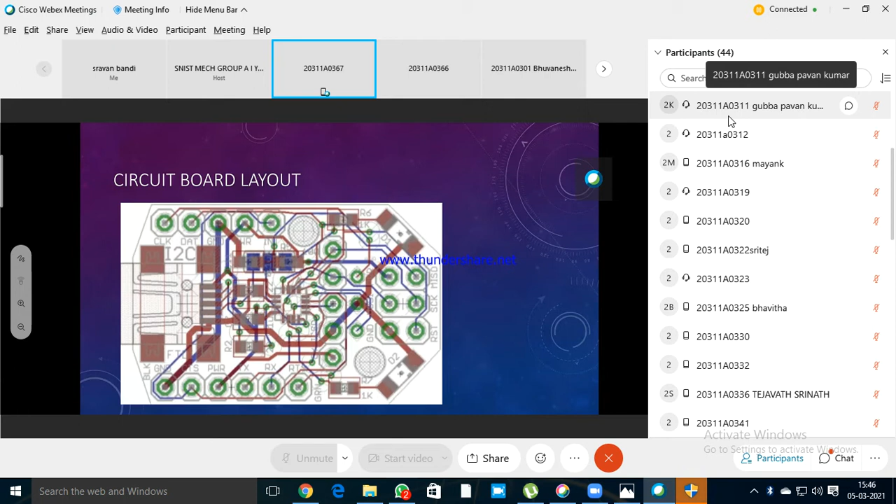Applications: fault analysis in sophisticated underwater systems like hydroelectric power projects, capturing high-resolution images of deep water flora and fauna, temperature measurements, diving into unknown water bodies, and exploring areas of human inaccessibility.

Thank you. So completed, sir.

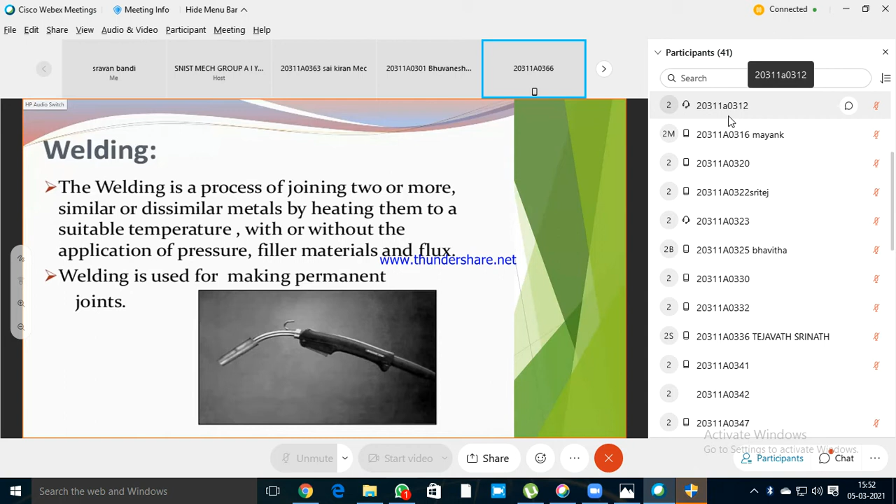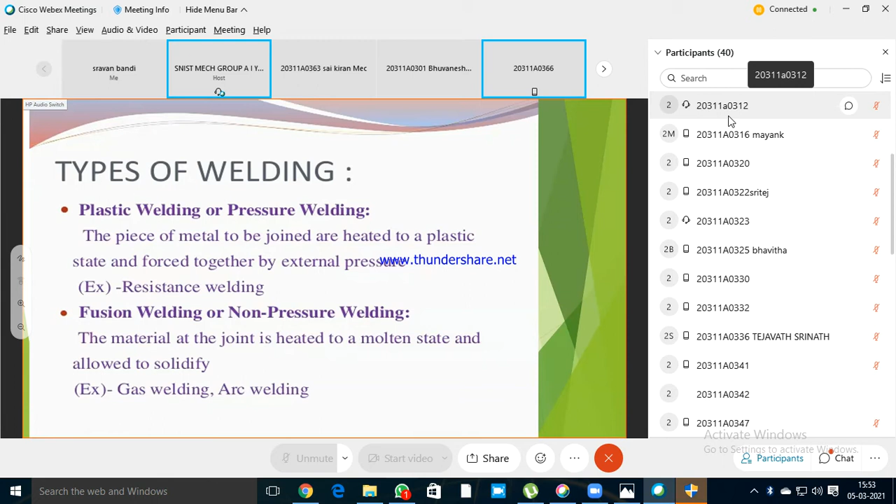Next slide, sir. Here are the types of welding. I am going to explain about the second one, fusion welding or non-pressure welding. This means the material at the joint is heated to a molten state and allowed to solidify, for example gas welding and arc welding, which I will explain next.

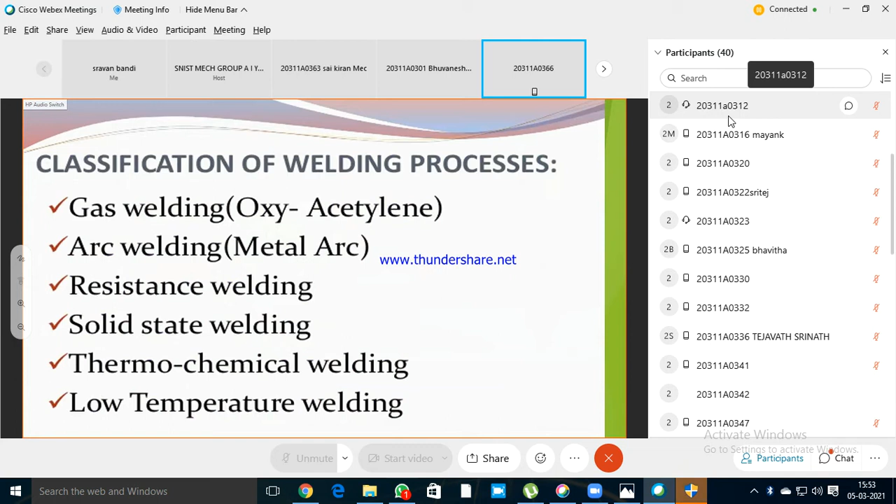Next slide. Coming to the content, gas welding. What is gas welding? Gas welding is a fusion welding process in which the heat used for welding is obtained by the combustion of oxygen and fuel. The fuel may be acetylene, hydrogen or propene. The types of fuel used for gas welding are oxyacetylene, air acetylene, oxyhydrogen and oxyfuel.

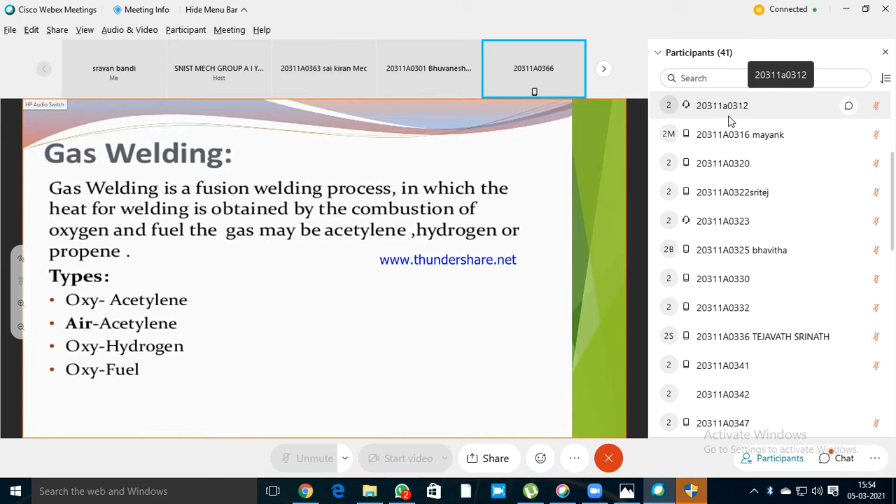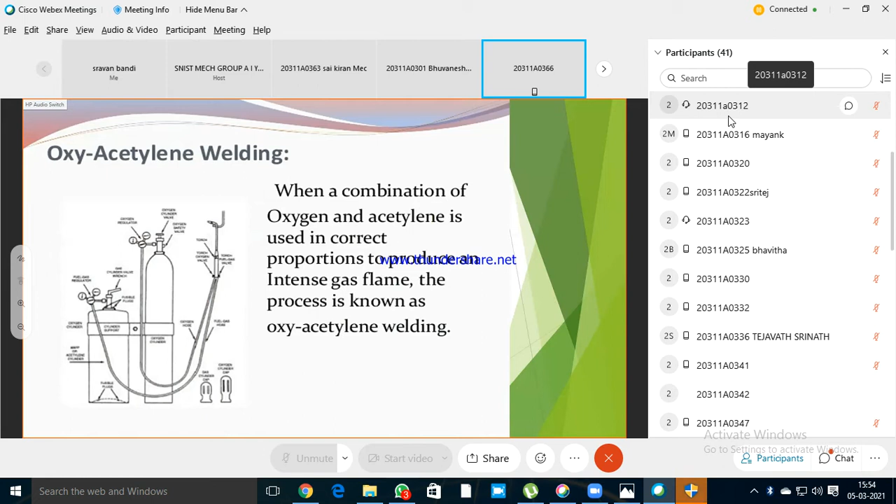Next slide. Coming to oxyacetylene welding: it is a process where combination of oxygen and acetylene is used in correct proportions to produce an intense gas flame. This process is known as oxyacetylene welding. Here we can see how the apparatus or equipment is arranged in sequence, which may be arranged in factories or wherever the welding process progresses. Next slide.

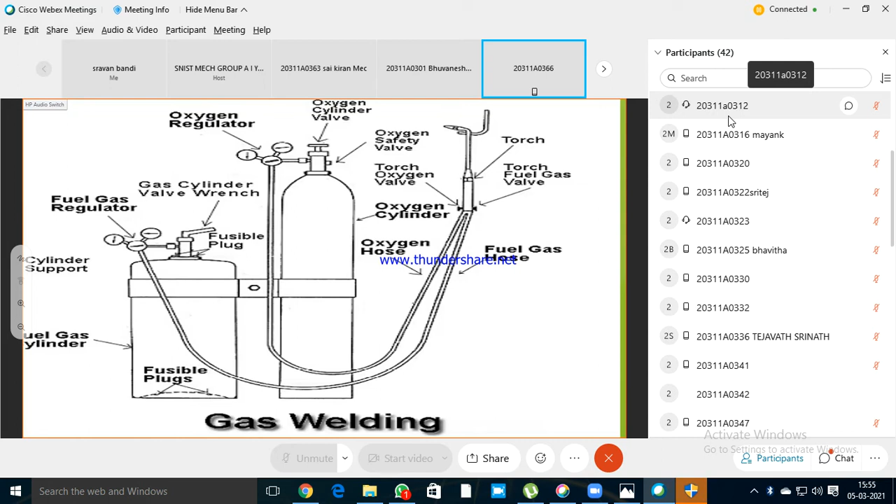Equipments required for the above arrangements are gas cylinders. In those gas cylinders, oxygen and acetylene pressure are required. The quantity of oxygen is about 125 kilogram per centimeter square, and the acetylene quantity is 16 kg per centimeter square.

Coming to the regulators. Working pressure of oxygen is about 1 kg per centimeter square, and working pressure of acetylene is about 0.15 kg per centimeter square. Working pressure varies depending upon the thickness of the work pieces being welded. The quantity must be mentioned as oxygen equal to 1 kg per centimeter and acetylene must be 0.15 kg per centimeter square.

Coming to pressure gauges, hoses, welding torch, check valve and non-return valve.

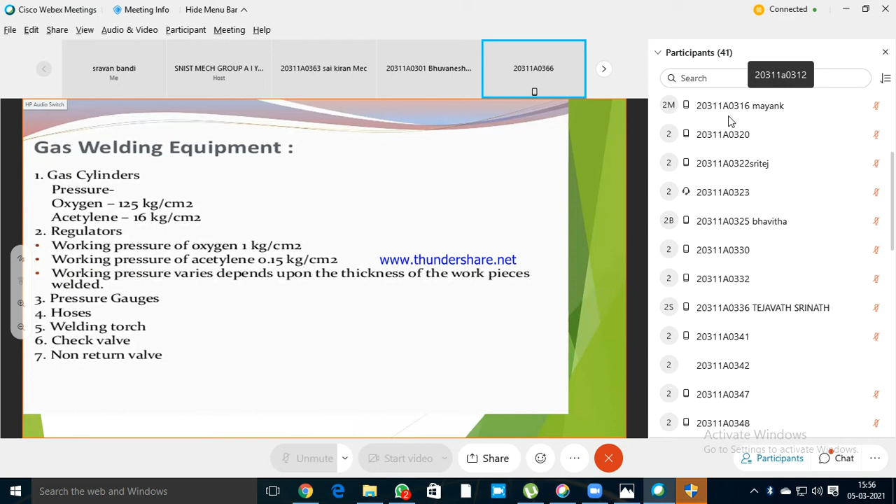Advantages and disadvantages. Coming to the advantages: portable and most versatile process, it can be moved easily from one place to another, versatile means flexible, better control over the temperature, suitable to weld dissimilar materials, low cost and maintenance.

Coming to the disadvantages: it is not suitable for heavy sections, meaning it is not good for heavy processing industries, it has a lower working temperature of gas flame, and has a slow rate of heating.

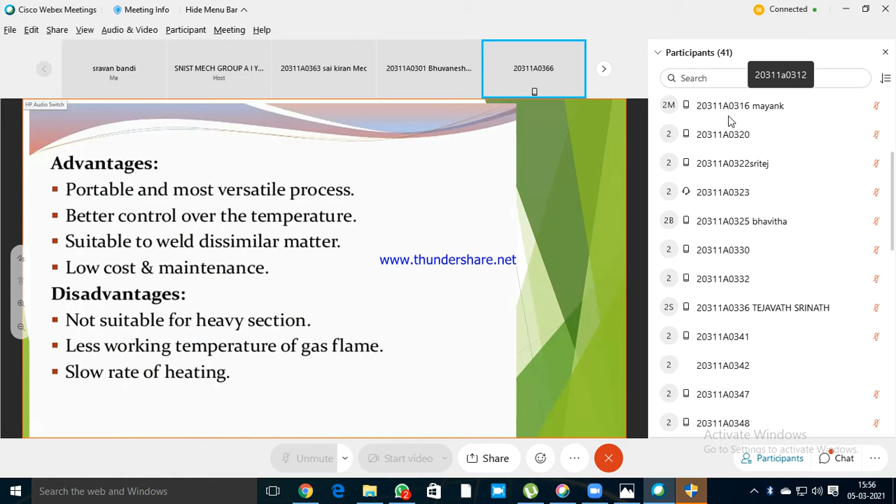Coming to arc welding or metal welding. Arc welding is a fusion welding process in which the heat required to fuse the material is obtained from the electric arc between the base metal and the electrode. It is linked with electricity.

Types: metal arc welding, submerged arc welding, tungsten inert gas welding, metal inert gas welding. Here I am going to explain the first one, metal arc welding. The rest of the three are expensive.

Equipments required for metal arc welding: a welding generator, which may be direct current or transformer, or AC current; two cables, one for work and another for the electrode holder; electrode, protective shield, gloves, wire brush, chipping hammer, goggles.

Metal arc welding uses an electric arc to coalesce metals. It is the most common method of welding metals. Electricity travels from electrode to base metal to ground.

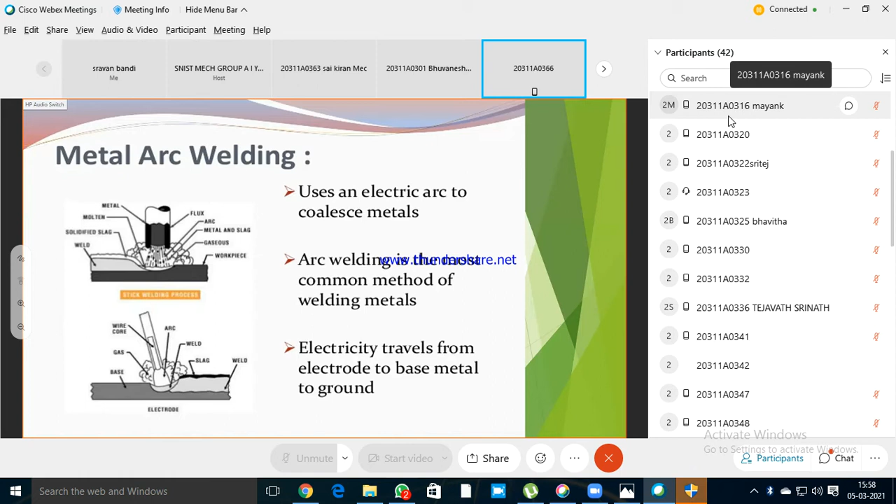Here there are two different types of processes: stick welding process and electrode process. Coming to the stick welding process, on the right side we have flux, arc, metal and slag.

You may know about the terminology which you have heard in chemistry last year or before, flux and slag.

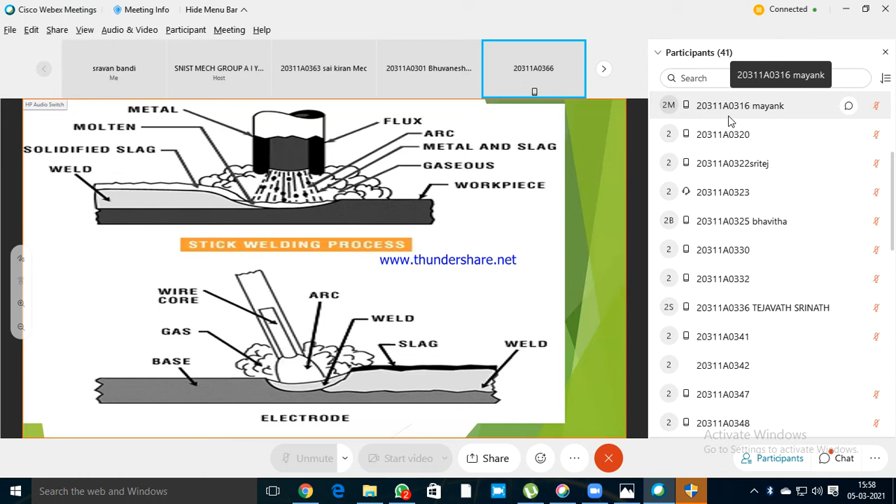Advantages and disadvantages. Coming to the advantages: most efficient way to join metal, low cost joining method, offers lightweight through better utilization of materials, joins all commercial metals, provides design flexibility.

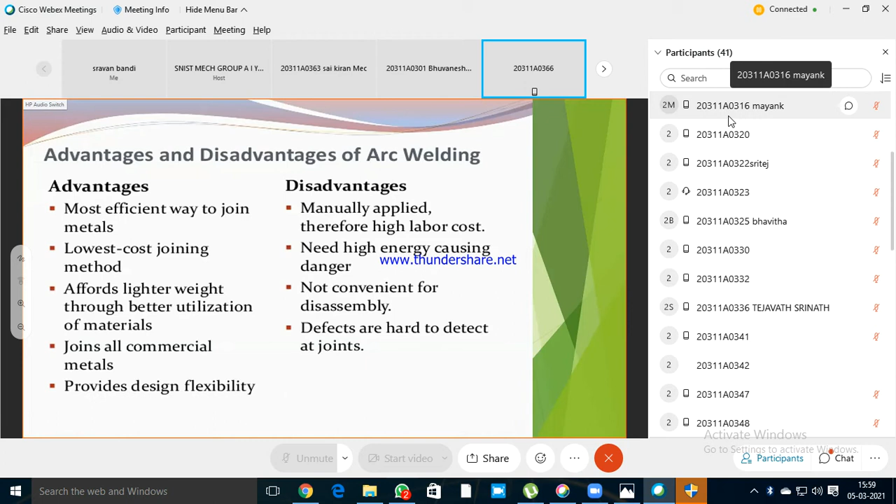Disadvantages: manually applied, high labor cost, needs high energy causing danger, not convenient for disassembly, defects are hard to detect at joints.

Applications: it is used in the manufacture of automobiles, aircraft frames, railway wagons - meaning the railway which carries goods - machine frames, structural work, tanks, furniture, boilers, general repair work and shipbuilding. Boiler means it is majorly used in boilers in industries.

Coming to the conclusions, we have learned somehow about the welding process, particularly about the most popular welding types used in industries. A good weld is always strong. Generally, welding equipment is not very costly, and portable welding equipment is available. A large number of metals and alloys, both similar and dissimilar, can be joined by welding. Welding permits considerable freedom in design.